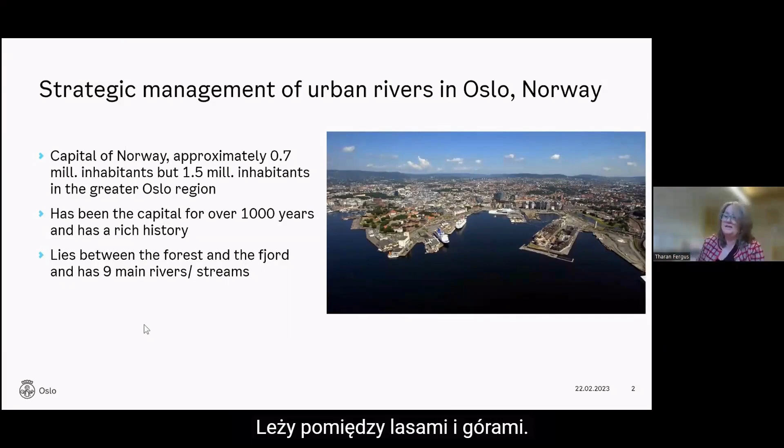The city, which is blue and green, between the forest and the fjord. And I have a nice picture of Oslo here, where you see the fjord, the city, the blue, the green, in between the blue fjord and the green forest, which is of course very widely used, and where we also get our drinking water supply from.

Actually, we see the drinking water supply is right in the middle of the picture, and runs. We have a big river called Akerselva, which runs out into the fjord, right in the middle of the picture, down here.

The streams and rivers of Oslo, like many other cities, were closed up during the last 150 years due to the advent of the modern sewage system.

Of course, these rivers were first started to be used as sort of conduits for sewage. And sewage was just dumped into the rivers, and they stank, and they were, of course, conduits for disease. So when we got the first modern sewage system, there was a lot of people wanted these streams to be closed and become part of the sewage system.

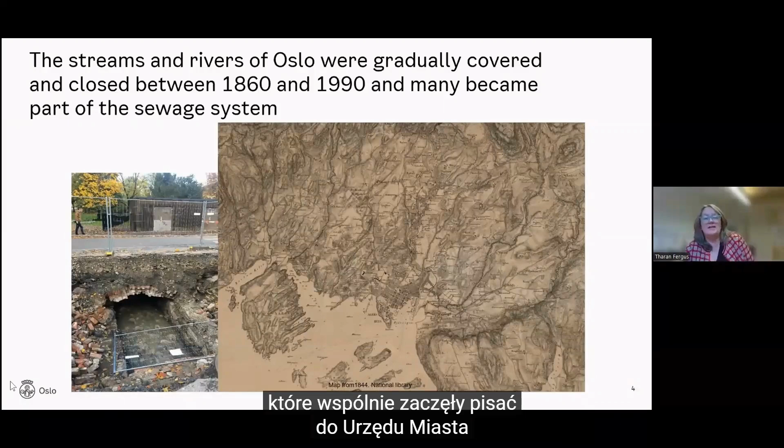They were also closed up in some parts of the city because of safety issues, that there was mothers who went together and sent letters to the municipality and wanted the dangerous streams covered up because their children were in danger of drowning.

So that was also actually the case in some small streams, but also mainly because of this sanitary problem, that the streams were unsanitary and dirty.

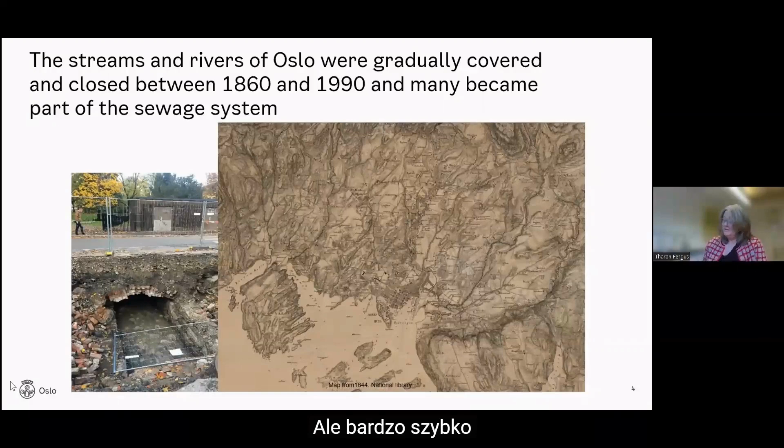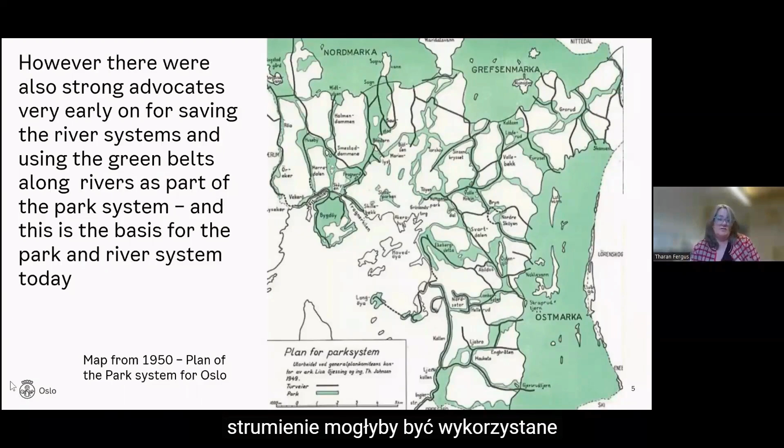But we did also have some very strong advocates, actually, and very early on, that wanted to save the river systems and use them as part of a park system, and saw that these streams could be used as part of the sort of park system and the landscape, and the park system should follow the natural system of rivers and the natural landscape.

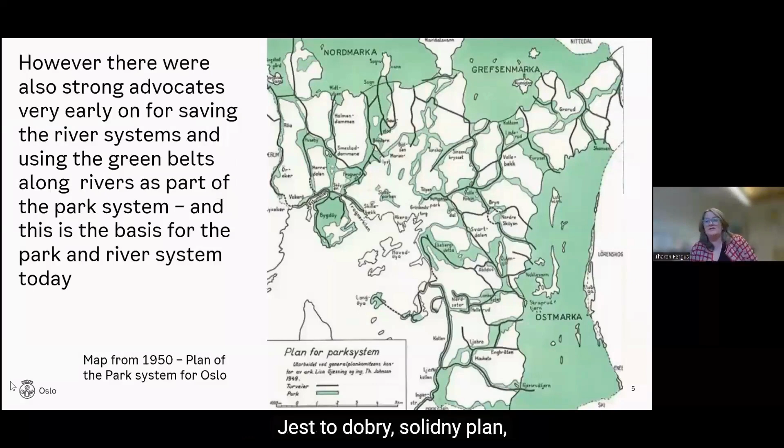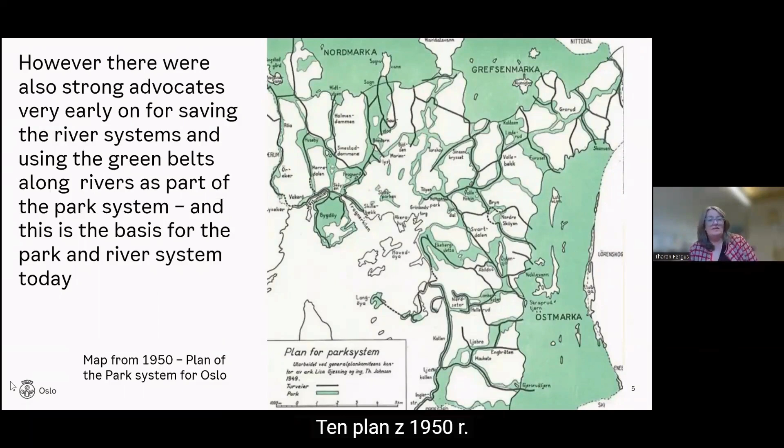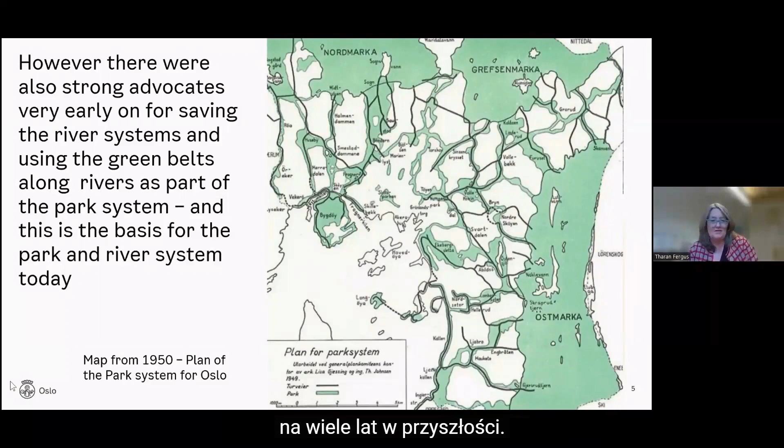So that was, this park plan is from 1950. So, and it's quite a strong plan that we are building our management of rivers on today. This plan from 1950, and which was developed throughout the 40s to 1950, has really been a very strong part of our heritage. So you can say plans that you make today will leave an impression on your city for many, many, many years to come if it is a strong plan based on the landscape.

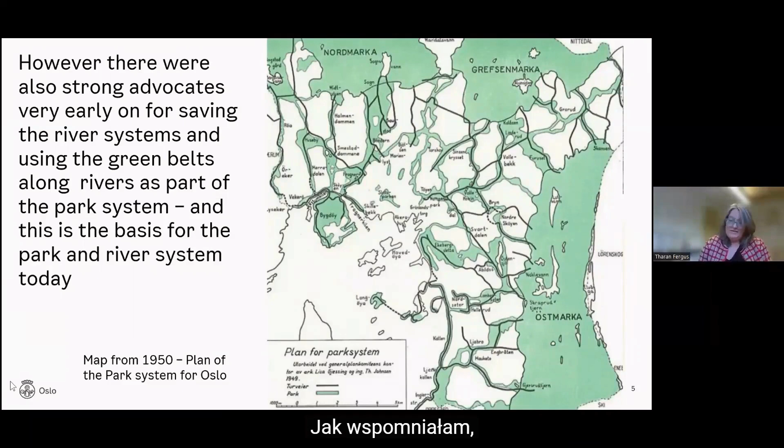So and as I said, this is a plan we build on and we use as part of our management today. Of course, the main strategic tool for planning and managing our rivers is the sort of overall municipal plan, which is made every 4 years, and where we give legally binding requirements.

An example is that you're not allowed to build along the river corridor for the main rivers. You're not allowed to build closer than 20 meters to the river, or 12 meters from a stream. Legally, these have not been binding until today, but they're proposed to become legally binding requirements.

Still quite strong. The municipal plan is where we can issue management strategies, which are taken down into local plans, regulation plans, and building plans. So the really important tool for all river managers is your municipal plan. I'm sure that's quite a common plan that many countries and cities operate with.

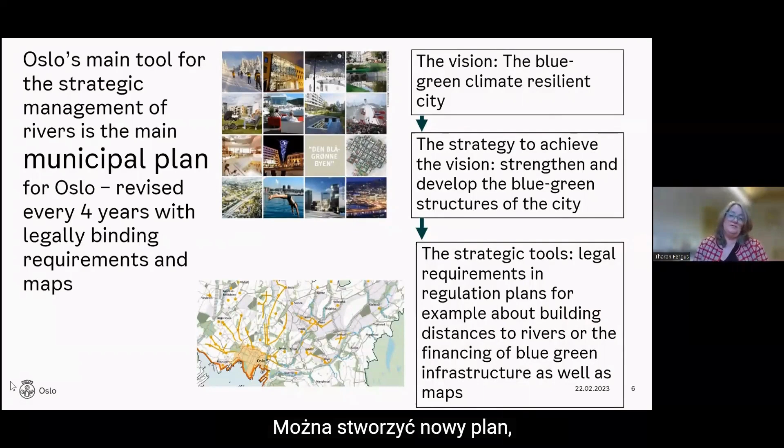In Norway, our plans are rolled every 4 years, with a new plan coming. We have city elections every 4 years, so the politicians want to put their mark on the city, and the municipal plan is given a makeover every 4 years.

So you have a vision, which is the blue, green, resilient city. And then we have a strategy for how to achieve that vision, which is to strengthen and develop blue-green structures in the city. The strategic tools to achieve that vision include legal management, but also a great many other tools, which I'll come into further on.

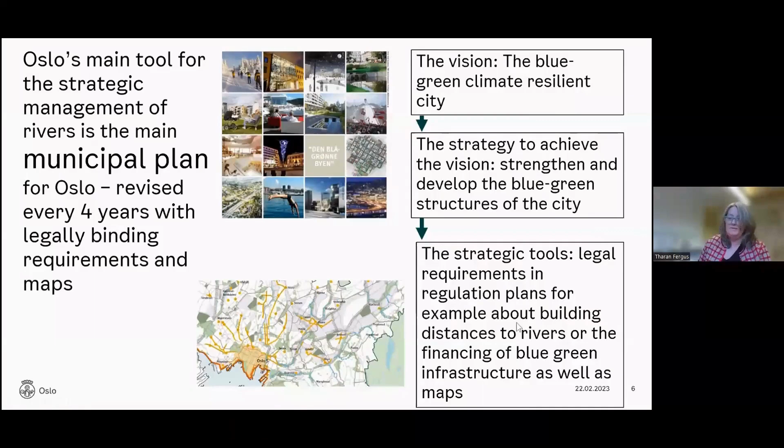One tool is actually the climate strategy for Oslo. We have a lot of strategies that follow the municipal plan, which outline the tools for management. The climate strategy towards 2030 says that we will preserve and restore our watercourses, fjord, parks, and outdoor recreation areas, enhancing our vision of a blue-green city.

And I'm actually sitting just behind these buildings here in the picture. So that's where my office is, that's where I'm sitting today.

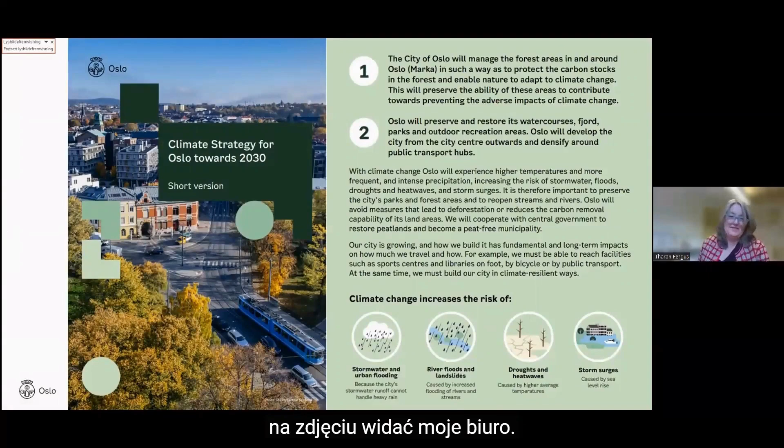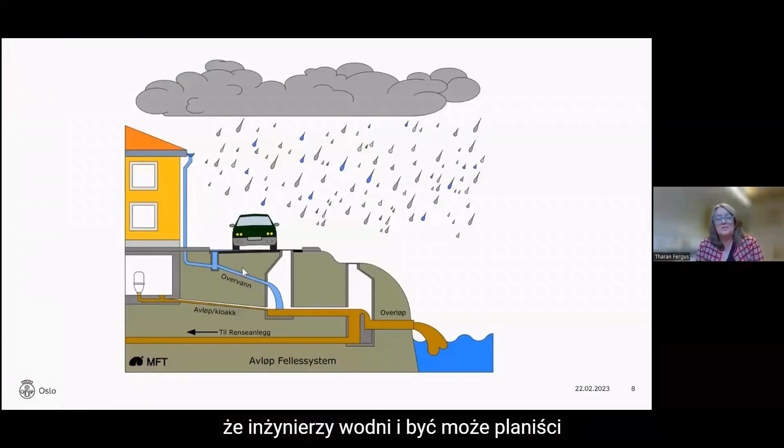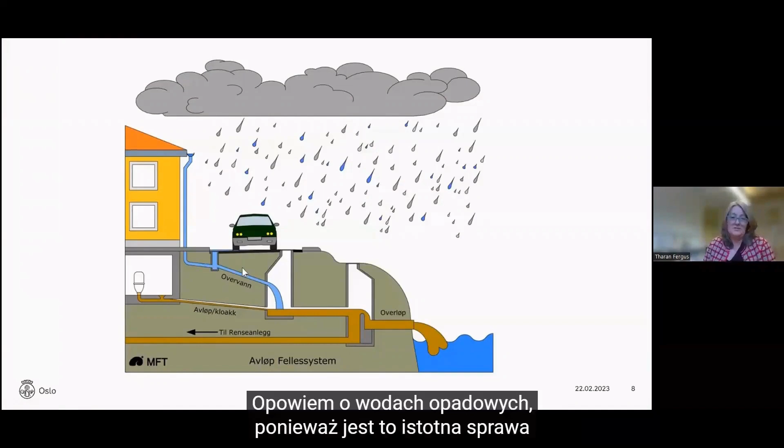Let's go down one slide. I'm sure this is familiar to water engineers and maybe some planners—it shows some of the issues we have in stormwater management. I'm going to talk a bit about stormwater management because that's quite an important part of urban river management.

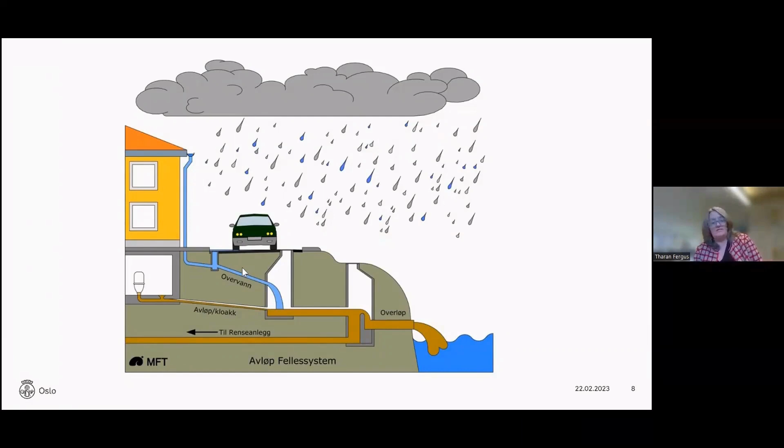As I said, the rivers were closed because of sewage, but not all rivers were part of the sewage system. Some were too big to become part of it and remained open, but a lot of the smaller streams and very small watercourses became part of the sewage system that also takes in stormwater.

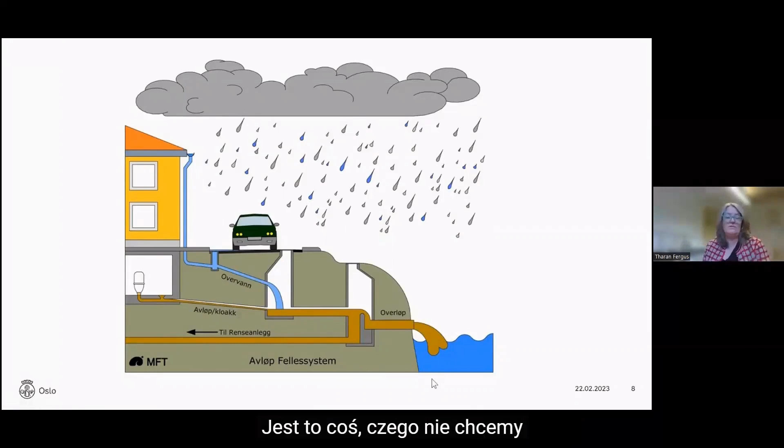So we have a stormwater and combined sewage system, as we call it. You can see in this picture how that works, with water entering the sewage system and some of it spilling into the rivers. That's a situation we don't want—we want to remove water from the sewage system so as not to pollute our rivers.

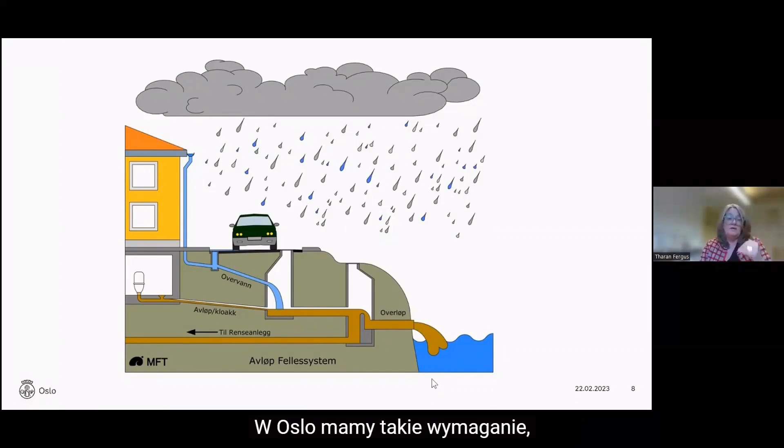That's an important part of the urban river management system. Going back to the municipal plan, the requirement in Oslo is that we have a stormwater management system that reduces the impact of climate change and of water going into the sewage system.

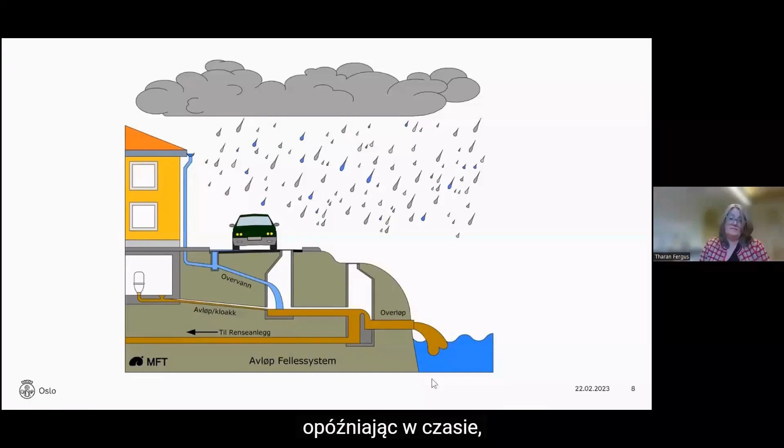We're trying to take water out of the sewage system by using open green solutions, delaying the time so we have less water going in faster into the sewage system. That's become part of the legal requirements in the municipal plan.

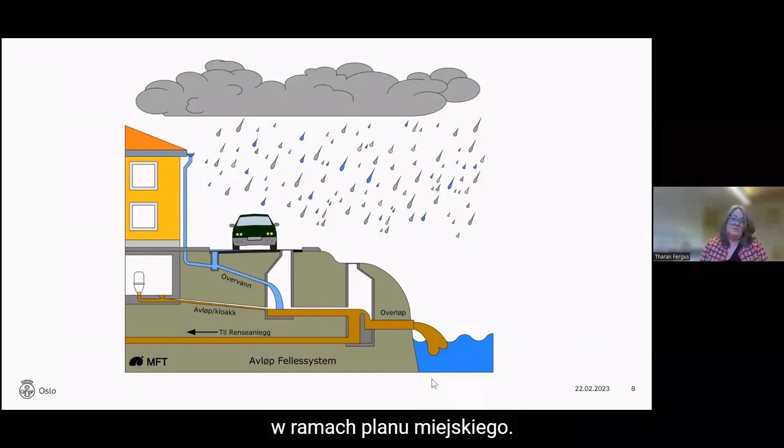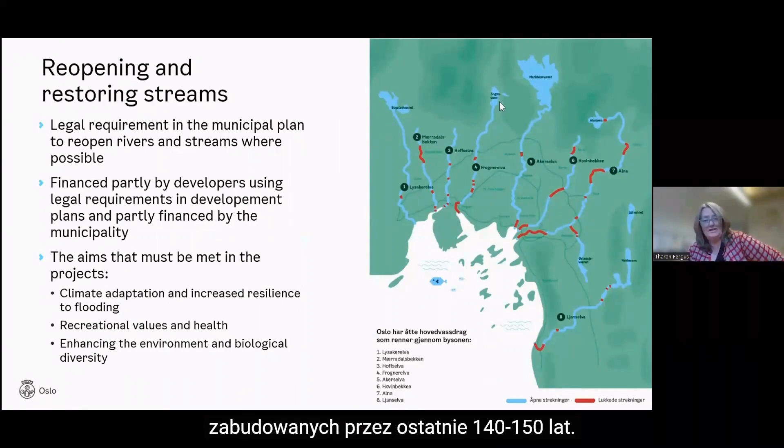We're going on to our rivers and streams, because that's sort of my main job—restoring these rivers and streams that were closed up during the last 140, 150 years or so.

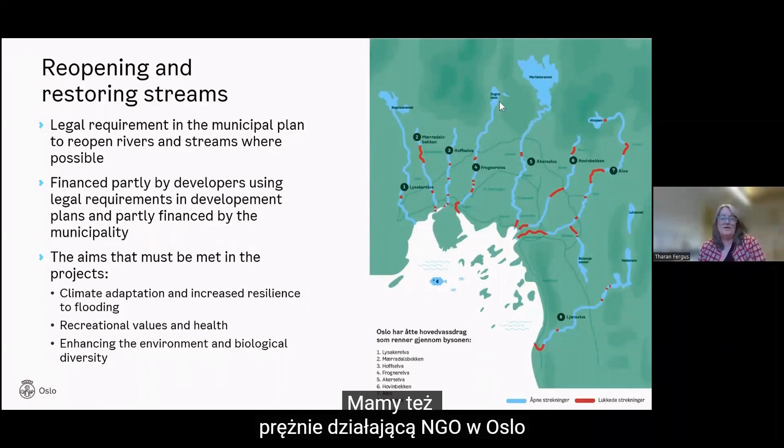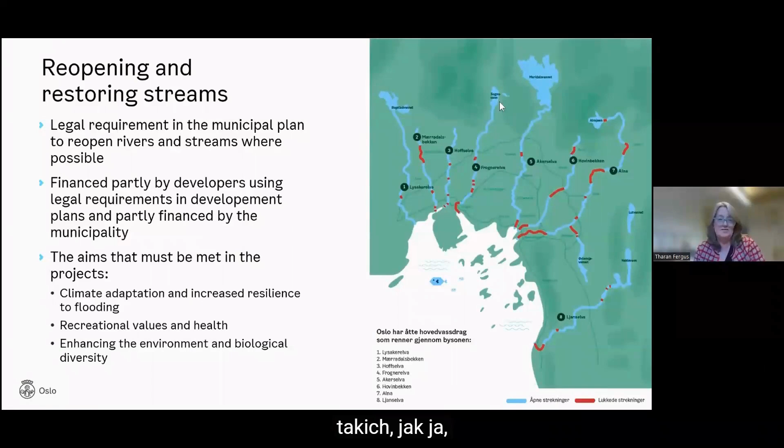But around 2000, or around 1990 actually, we started—we stopped closing up rivers and started reopening them, and began to get policies in place. We actually have a very strong NGO in Oslo called the Oslo River Forum, who are very active in pressuring politicians and bureaucrats like myself into doing our work in reopening streams.

So that's really good. If you're into reopening streams, get yourself a good NGO to help you, because they can pressure politicians in a different manner than us bureaucrats can do.

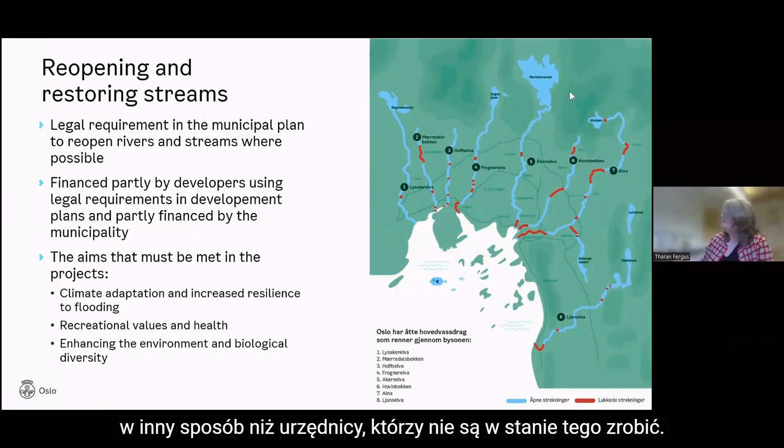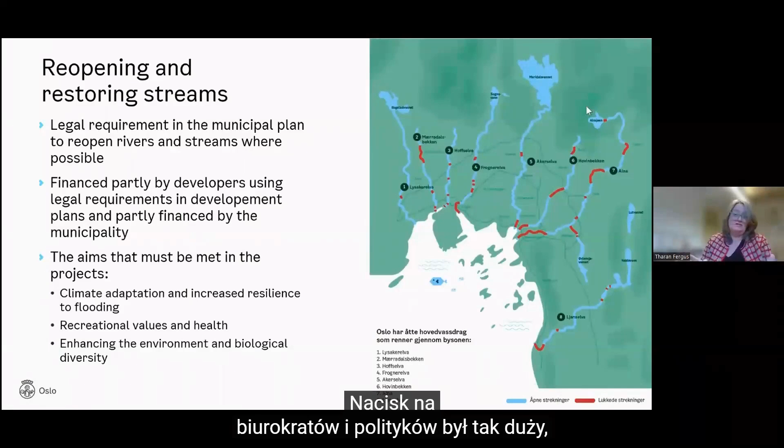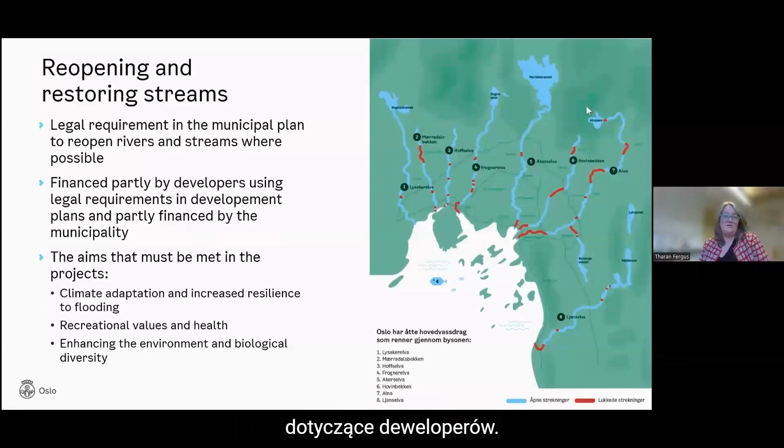They've pressurized bureaucrats and politicians to the point that it's also part of our municipal plan that there is a legal requirement that developers, or whoever's developing a plot that has a closed river, should look into if it's possible to reopen the river.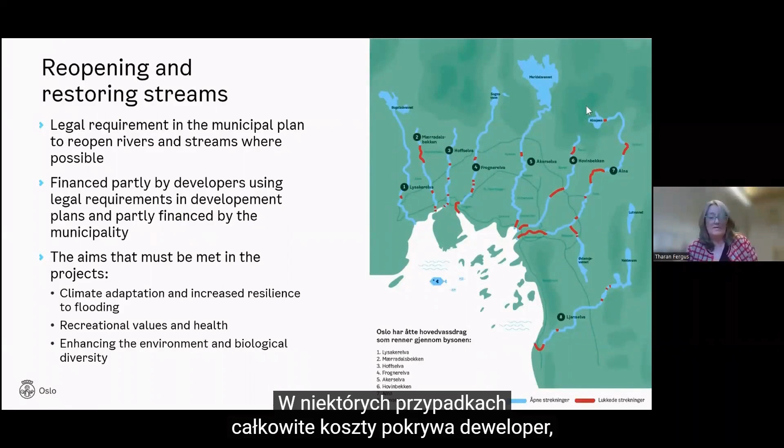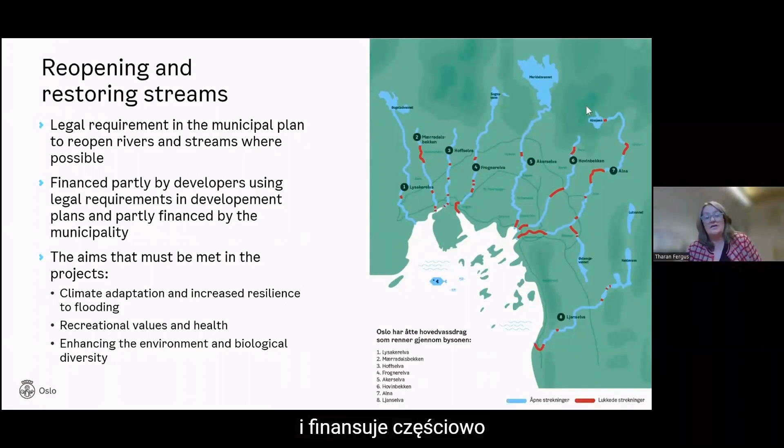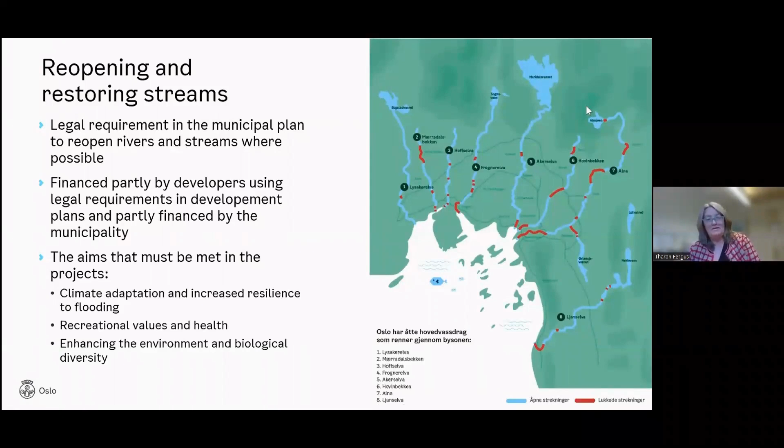The reopening of rivers is financed partly by developers and partly by the municipality itself. Some cases are financed completely by developers, but in some cases there are such big projects that the municipality goes in and finances part of the project in partnership with the developer. Sometimes there are projects where there are no developers, so we develop the project ourselves and get the municipality to finance it.

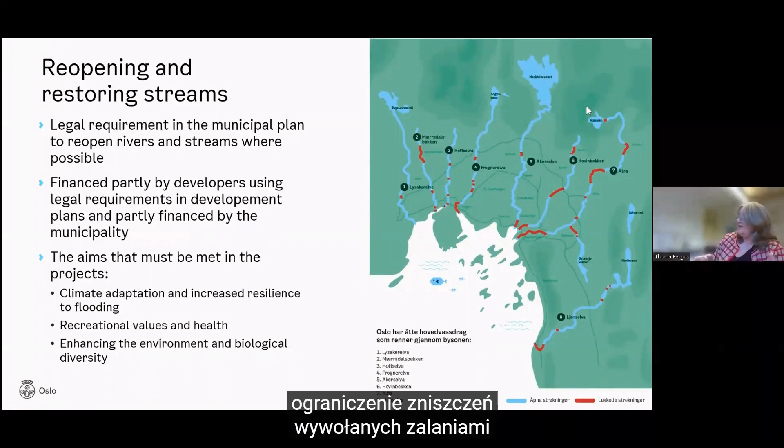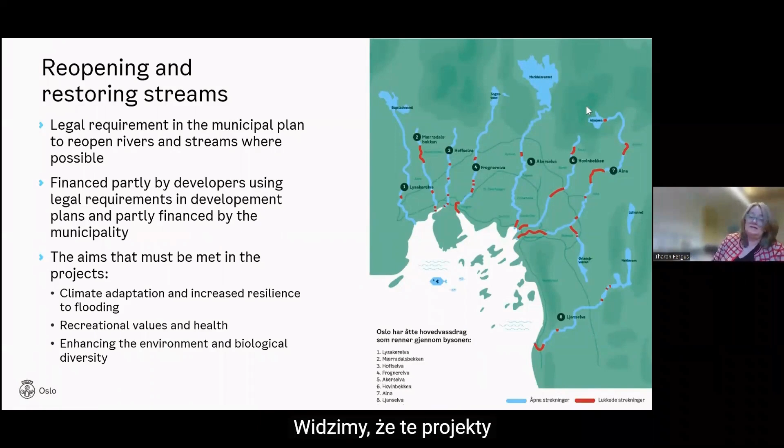So it's different, and the aims we have for the projects are climate adaptation and increased resilience to flooding, to reduce flood damage, recreational values, health, and enhancing the environment and biological diversity in the city. We see that these projects are really important for people in the city because then they don't have to go out into the forest to experience nature. They get nature in the backyard.

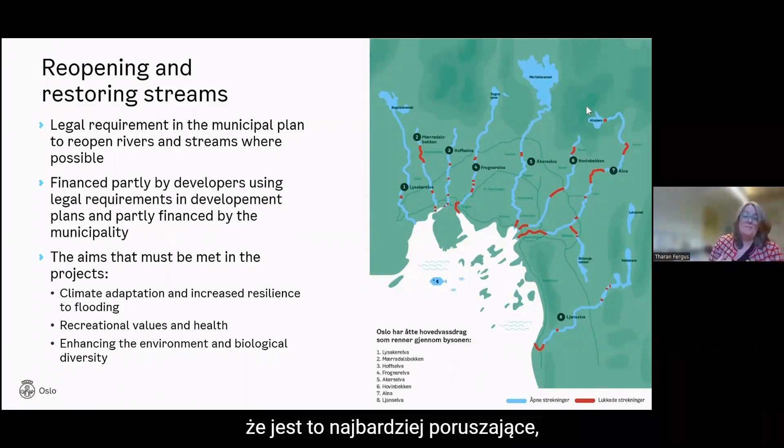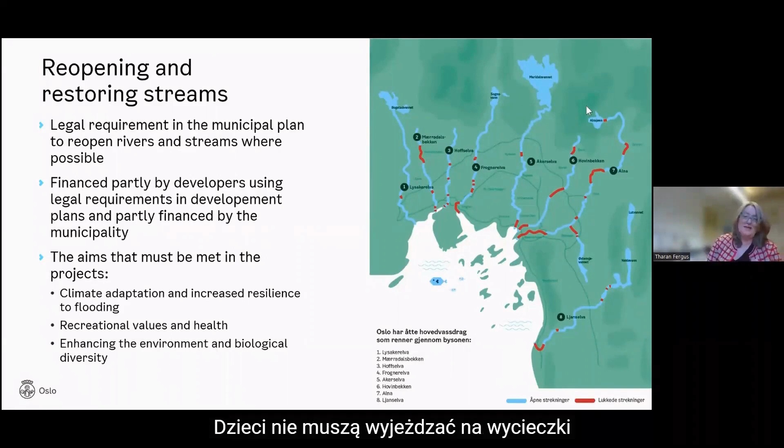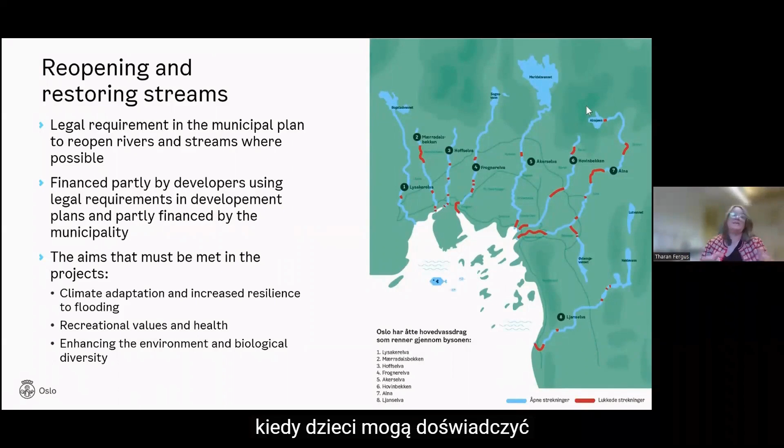I actually personally think that's the most moving thing, and the thing I like most about these projects is bringing nature into people's backyards, so kids don't have to be taken on a trip, because lots of kids don't go on trips. So it's very democratic when kids can experience a river or a stream in their own backyard. I think that's actually one of the most important aspects of reopening rivers and bringing nature into cities.

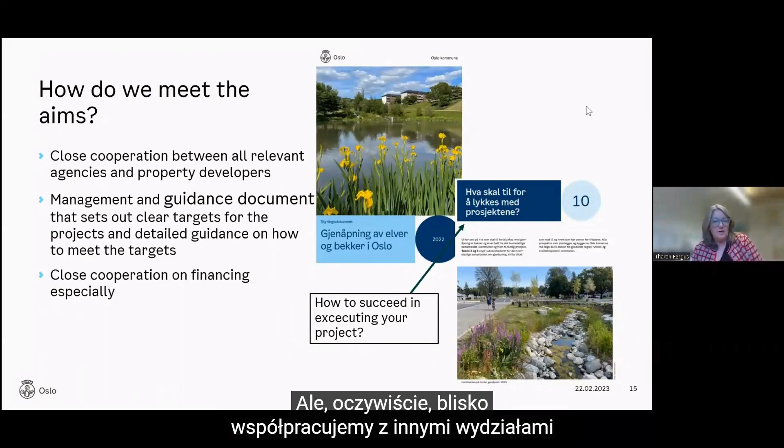So how do we meet these aims? I work in the Water and Wastewater Agency, and we are a sort of driver for these reopening projects, because we are a polluter of rivers. But we of course work in very close collaboration with other agencies, and that's completely necessary. We've got the Environmental Agency, who we collaborate very closely with, because they know all about fish and so on, and what sort of plants to put in the projects. They're also responsible for paths, benches and lighting and so on, all the sort of people infrastructure, whilst we're in charge of the technical infrastructure.

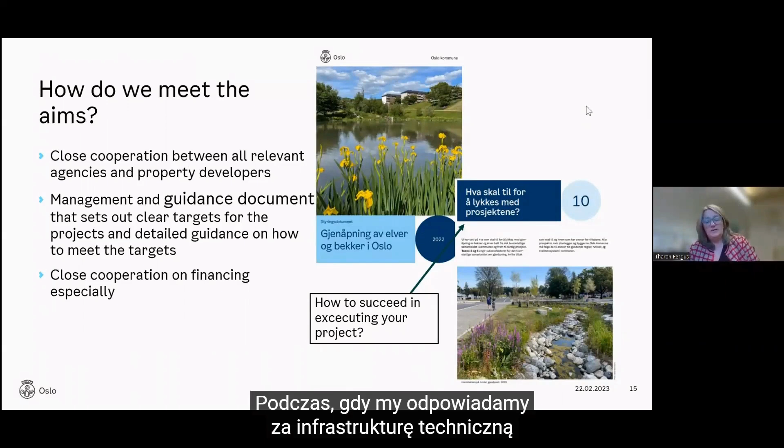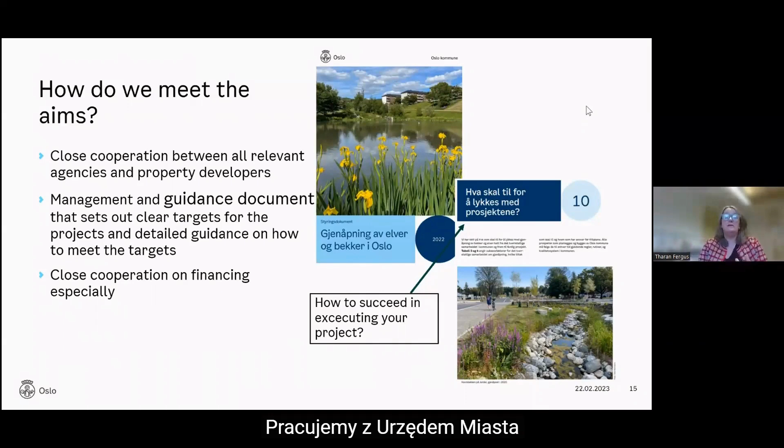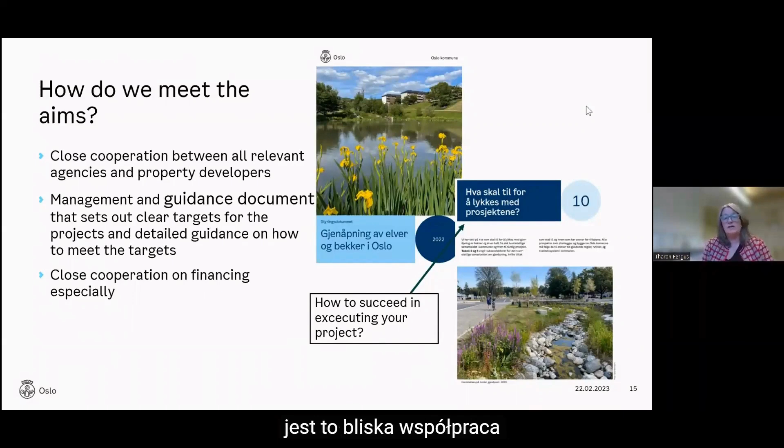We also collaborate very closely with the planning and building department, because they sometimes have to regulate space for this, and also have to make sure that developers put reopening into regulation plans. We also work with the city agency who owns land and negotiates settlements with developers. So it's a very close cooperation with many agencies, and it's really necessary that you have both an interagency and interdisciplinary approach to these projects.

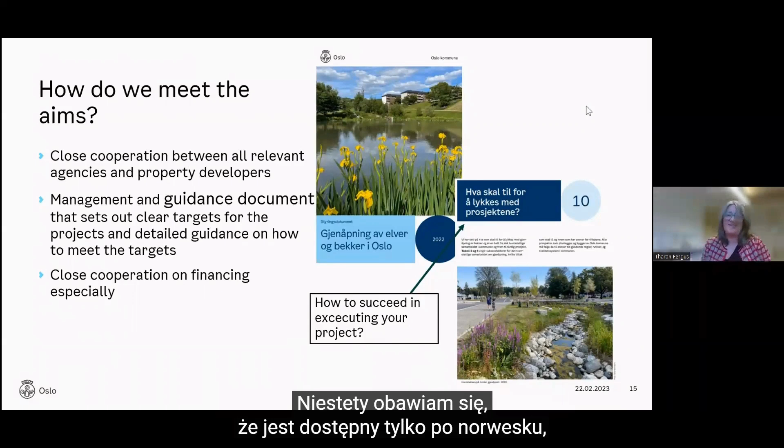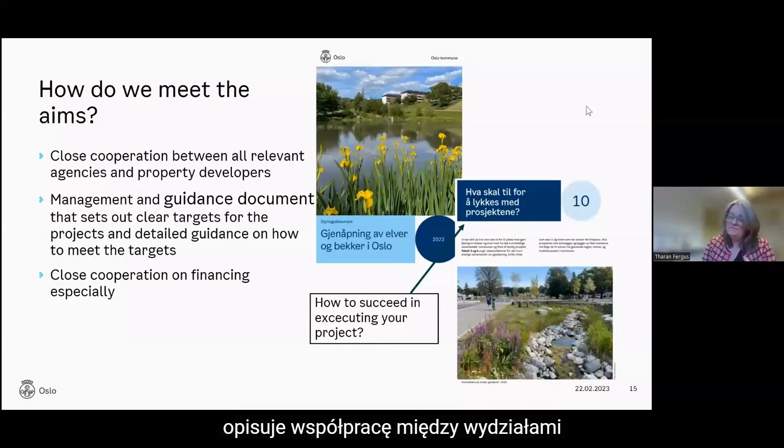We've made a management and guidance document on how to reopen rivers. I'm afraid it's only in Norwegian, but I'll send you the link. I don't think I put the link in my presentation, but it's really practical, and it's got lots of guidance on how you succeed in executing a project, and it's got all the legal basis for it. It's got all about cooperation between agencies and so on. One of the main important things is close cooperation on financing.

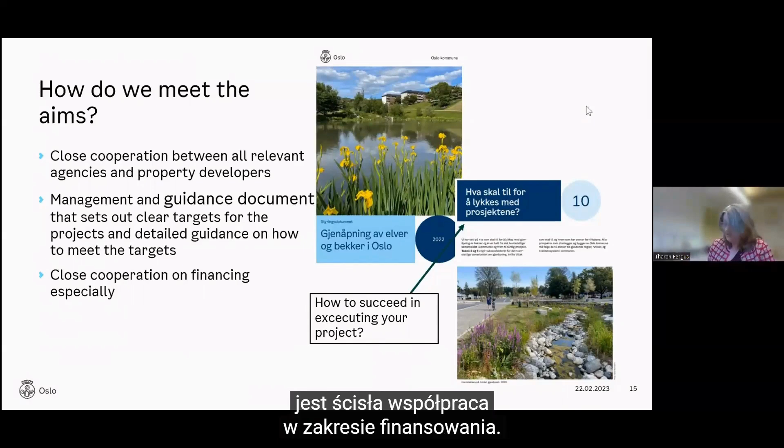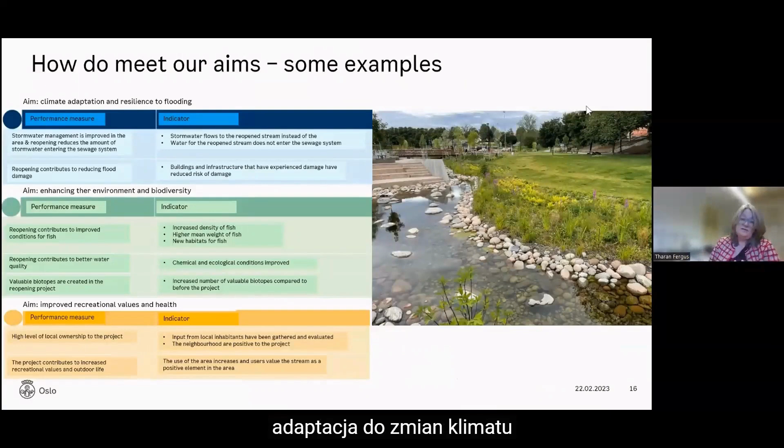So how do we meet some of our aims, just some examples, because our aims are of course climate adaptation, resilience to flooding, enhancing the environment and biodiversity, improved recreational and health values. So we've set up a whole lot of performance measures. Let's see if you can find my little arrow. Whoops, sorry, there we go.

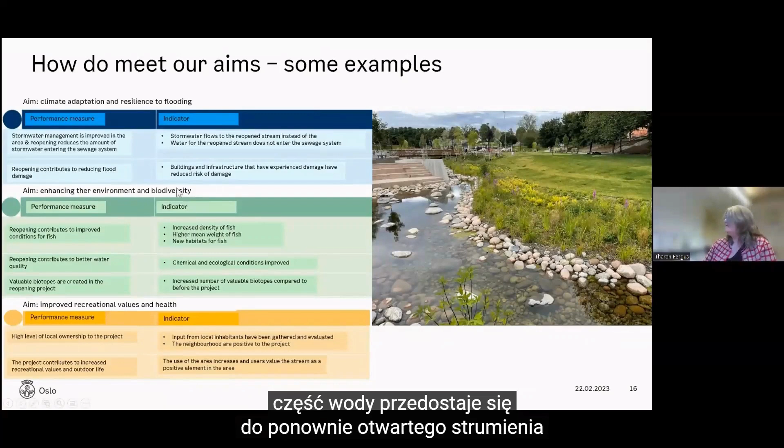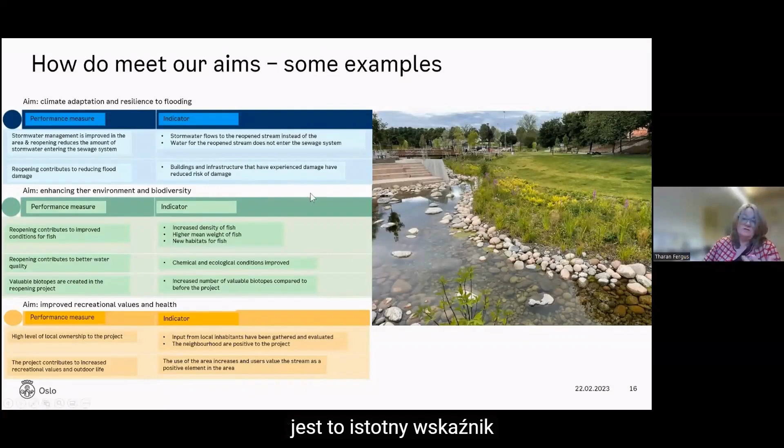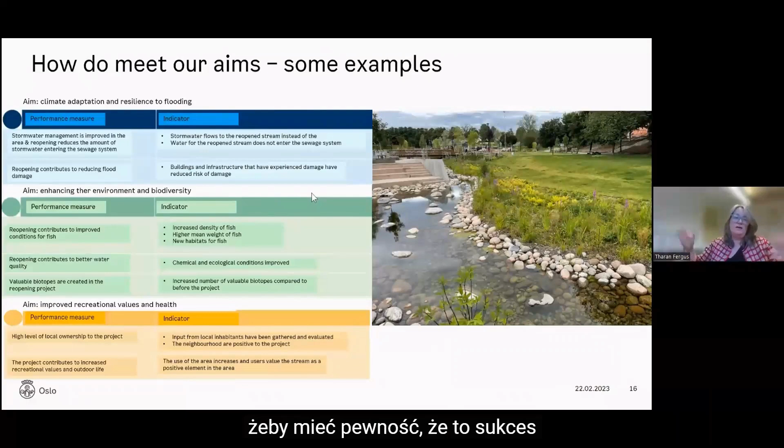Performance measures and indicators: you've got a performance measure, stormwater management. That's what we want - stormwater management is improved in the area, and reopening reduces the amount of stormwater entering the sewage system. What's the indicator for this? Stormwater flows to the reopened stream instead of the sewage system, and water for the reopened stream does not enter the sewage system. That's the important indicator, and it makes planners aware of what they've got to do in their projects - how are we going to ensure that stormwater enters the stream instead of the sewage system? So you've got to look outside your project to ensure that this is a success.

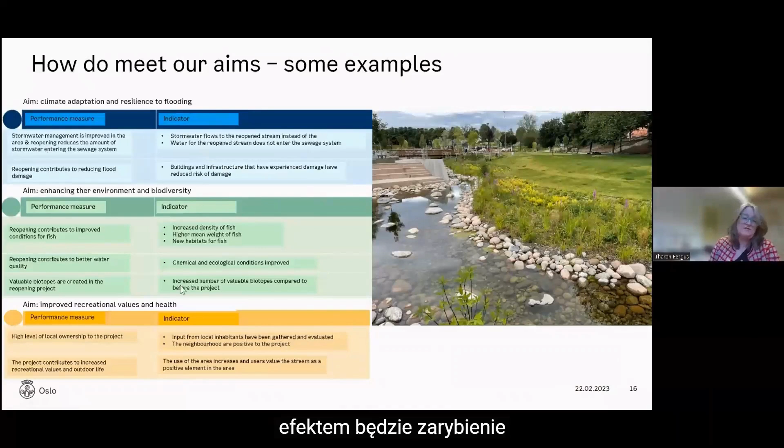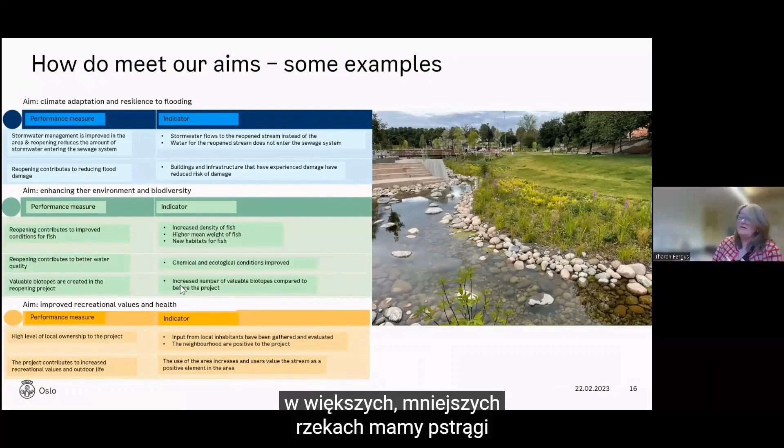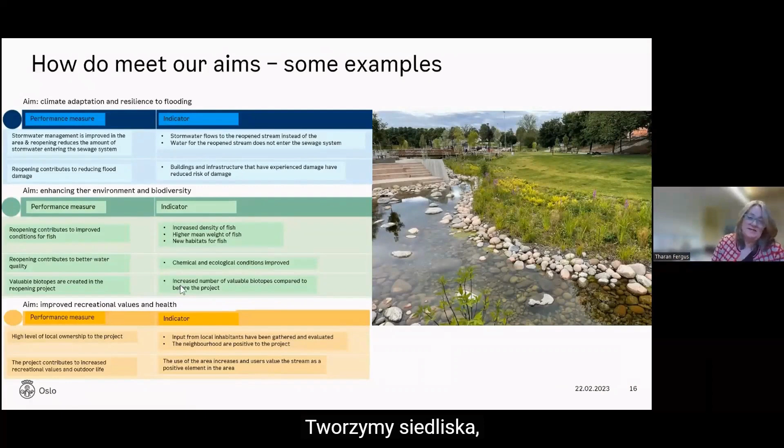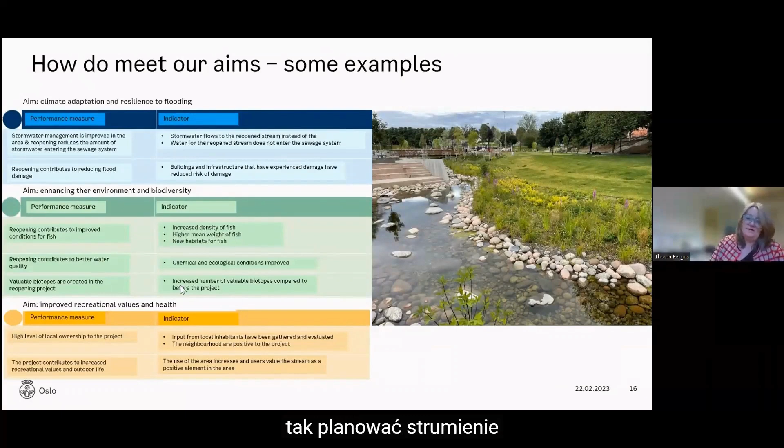Reopening contributes to improved conditions for fish. We get an increased density of fish - of course, if there was no stream before, you're going to get an increased density. We have trout in all the bigger Oslo streams. But when a stream is reopened, you get a higher density of fish because there was no fish there before. We also look at the mean weight of fish, which increases, and we create new habitats. That makes planners, at the practical level, think: we've got to plan and draw this stream so it's good for fish.

The same goes for better water quality, so we do some monitoring before and after. The project also contributes to increased recreational values and outdoor life - the use of the area increases, and users value the stream as a positive element in the area.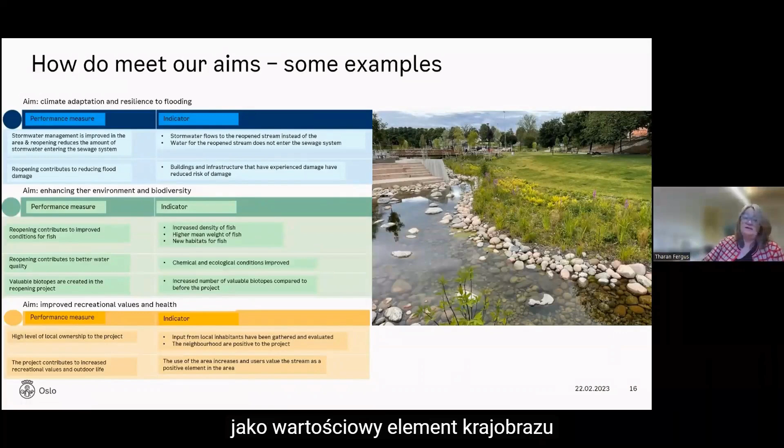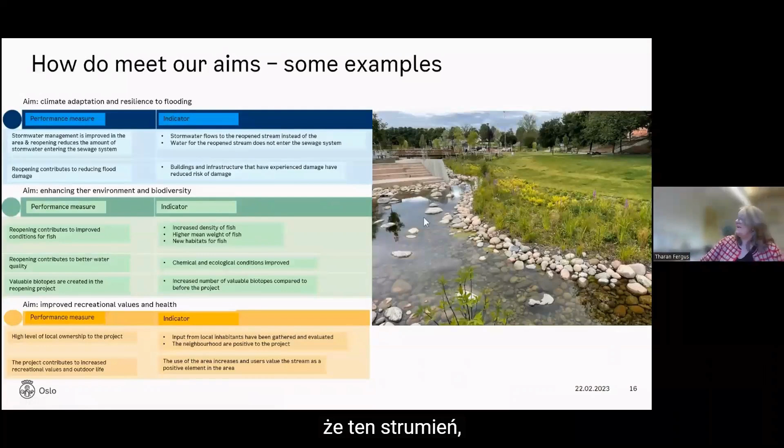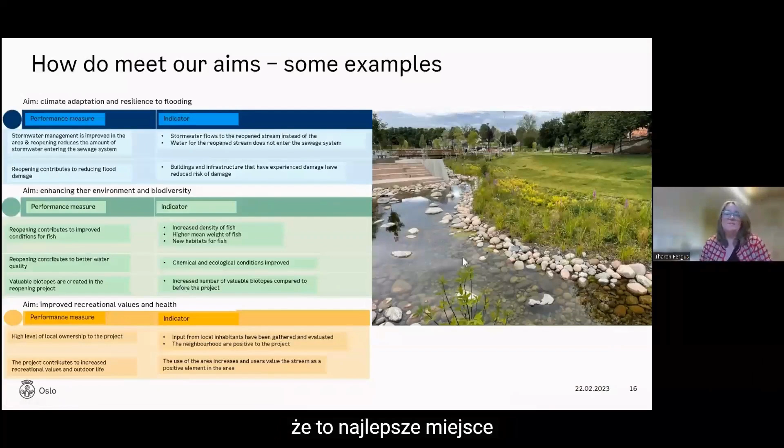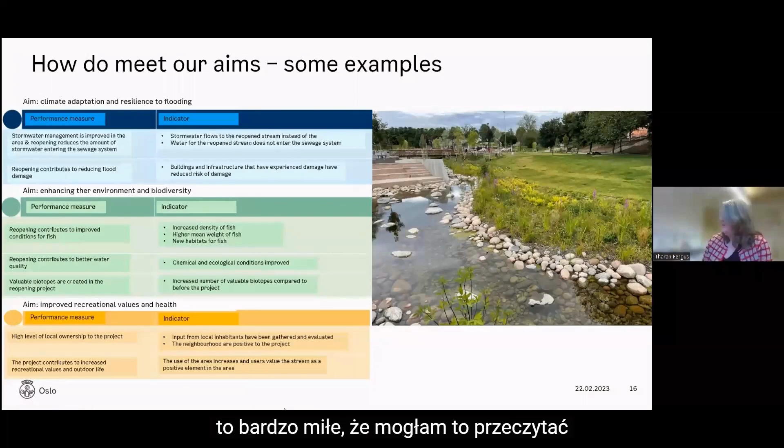Today I saw in the newspaper a famous cook talking about the Hovinbekken stream, which was reopened two years ago, saying this is the best area in his vicinity because it looks so nice and green. So we can check that users value the stream as a positive element. That's really nice to read, and it makes planners aware of what to build for this guidance.

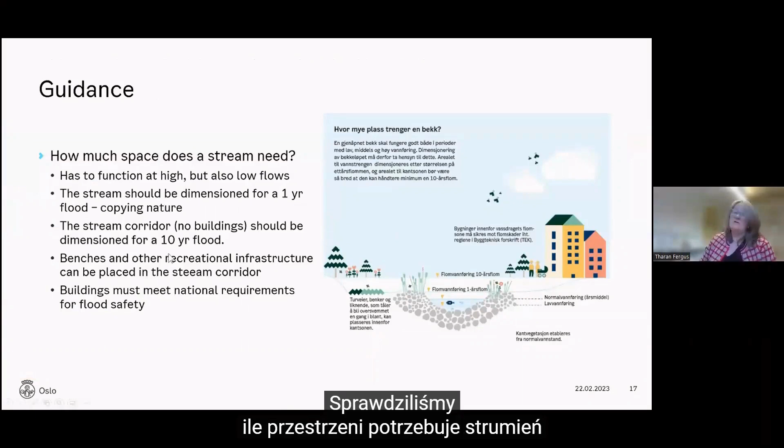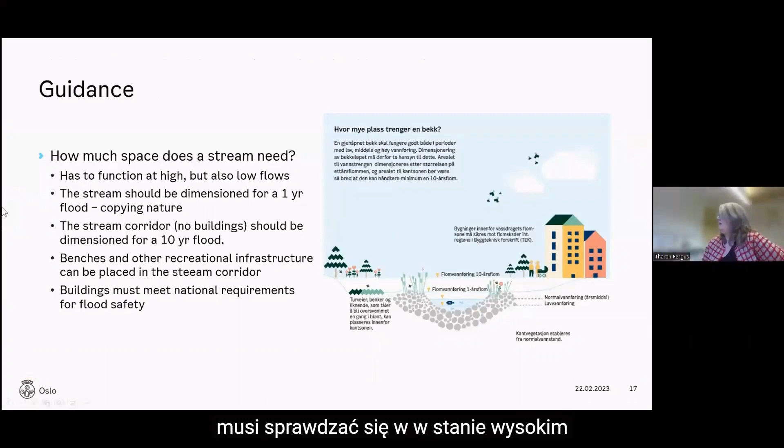We've also looked at how much space a stream needs, since that's often a question - how should I dimension my stream? It has to function at high flows, but also at low flows, because we're looking at drier, hotter summers in the future. So the stream also has to function at low flows. It should be dimensioned for a 1-year flood.

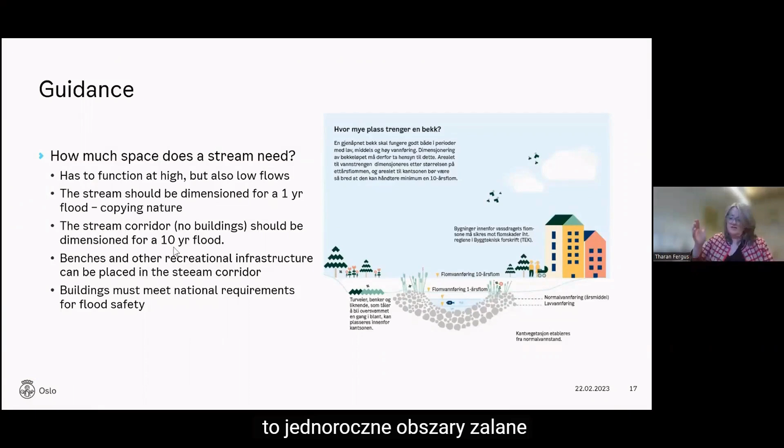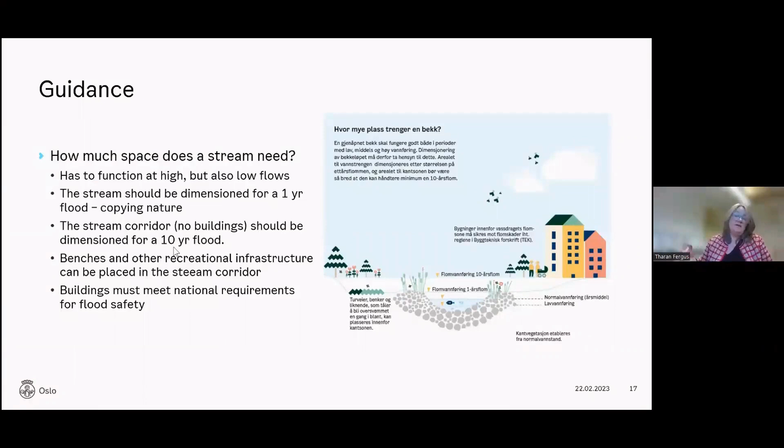That's copying nature - if you go into nature and look at a stream, the wet area is really dimensioned for a 1-year flood, from vegetation to vegetation on either side. Then there's the stream corridor, where you can have benches, lighting, and a pathway, but no buildings - that should be dimensioned for a 10-year flood.

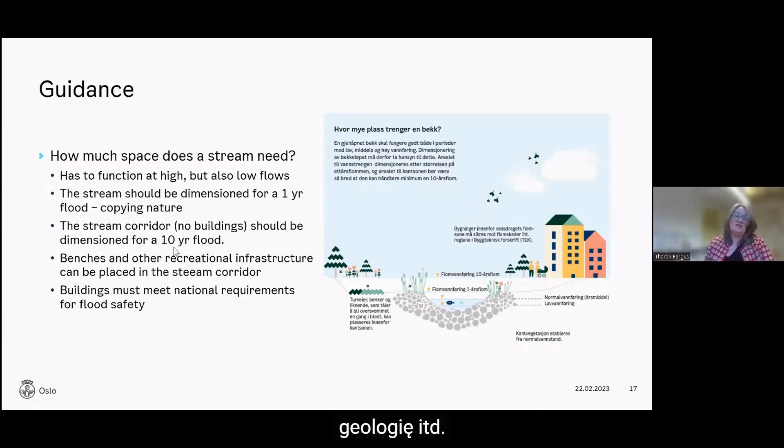Buildings near a stream have to meet national requirements for flood safety, but that can be done by safeguarding the building itself, not by building a huge stream. It's really important - the principle is to go out, look at what you have in nature, and copy it. That's the most basic advice I give anyone planning a stream: go look at a stream of similar size and copy it, dimension-wise, geology, whatever.

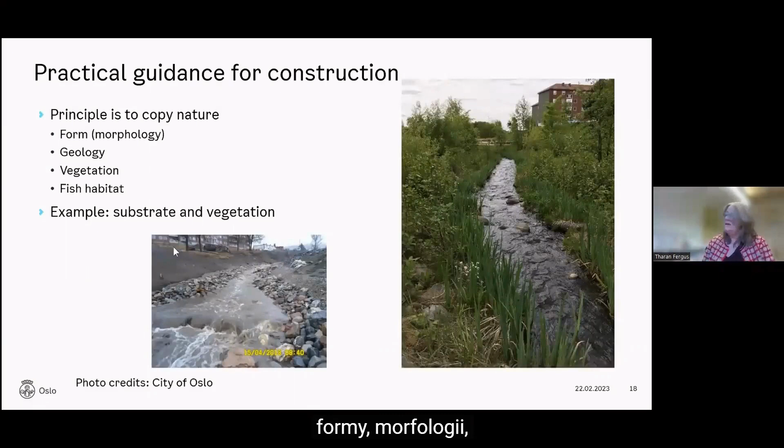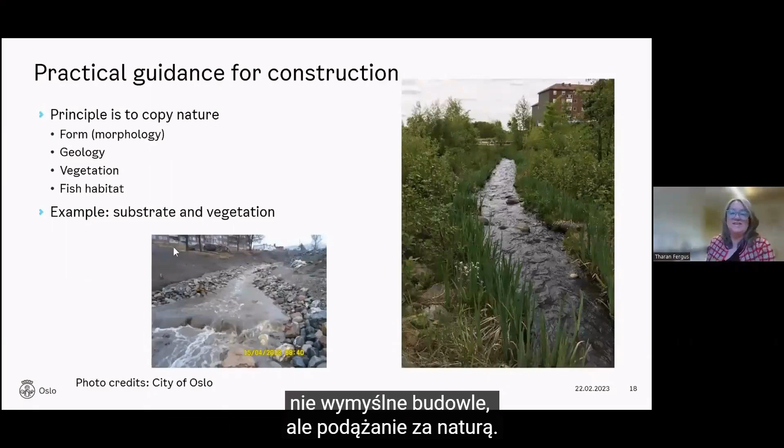So the principle is to copy nature - the form, morphology, geology, vegetation, fish habitat. That's really the best idea when planning a stream. No fancy construction ideas, just copying nature.

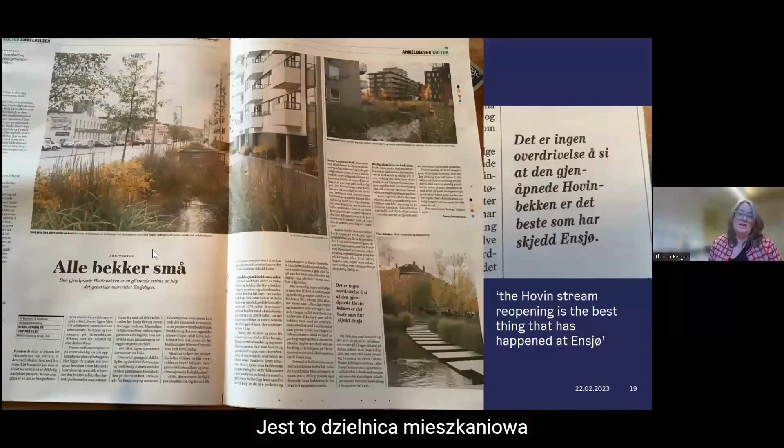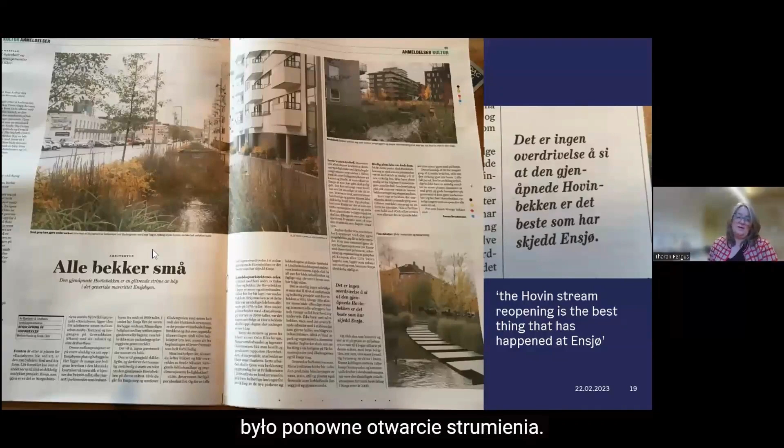This is also from the newspaper, saying the Hovin stream reopening is the best thing that has happened at Ensjø, an area where we reopened the Hovin stream - a residential area completely redeveloped from car city to living city. The big project through the area is reopening the stream, and it's really been a huge success for the people who live there.